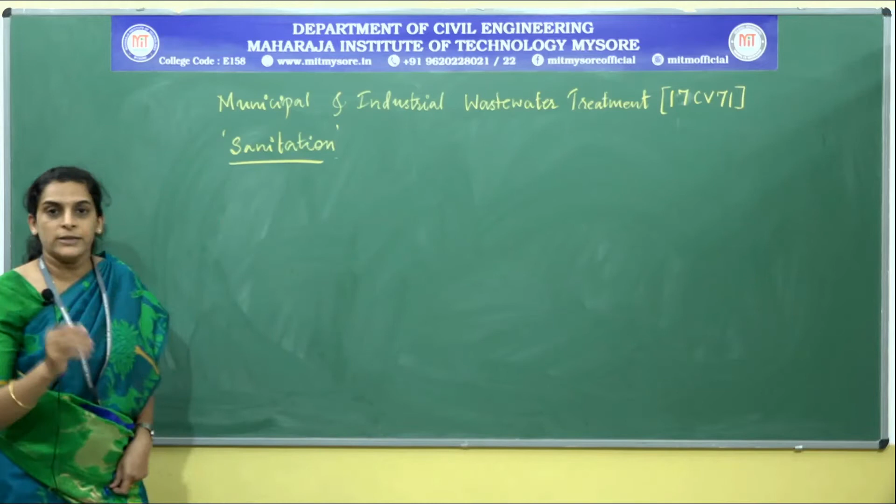So, proper maintenance of the sanitary condition is a very important aspect for any community in general and individual in particular. So, here it will be all our responsibility to hold these things in line. The next thing is, whenever we are talking about sanitation, the word that is very much applicable is sewerage.

So, what is sewerage? It is the process of removing sewage. So, I'll just tell you what sewage is. Sewage is nothing but the liquid waste, or technically speaking it is the wastewater. So, the process of removing sewage from a community is sewerage. So, what does it mean by removing sewage? It is the proper management of the sewage generated in a community in terms of residential, commercial and institutional. So, this will be the sewerage.

So, what is the next thing? Sewerage system. Sewerage system is nothing but the network of sewers. So, here what is a sewer then? Sewer is a conduit or a pipe in which the sewage is carried. That will be a closed conduit, but it shall not always be flowing full.

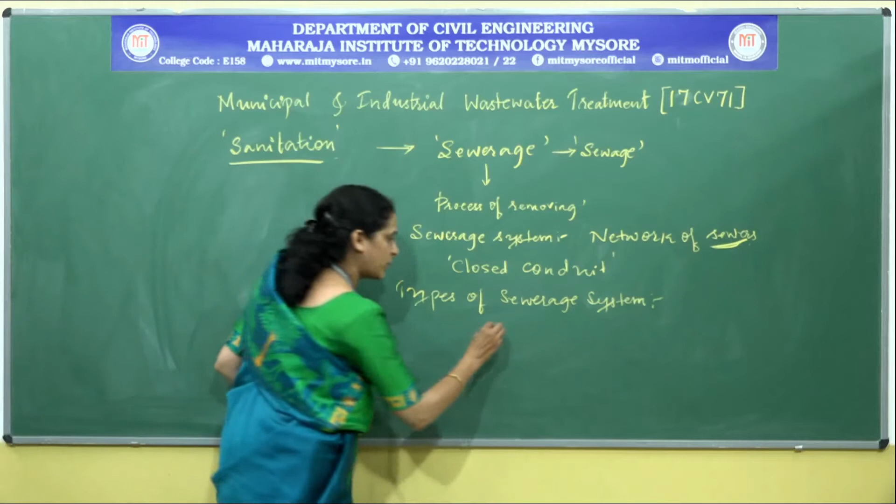The next important thing flowing on with this is the types of sewerage system. Types of sewerage system will be very important to understand, because all of us people in a community will produce different types of sewage. So, the first type of sewerage system is separate sewer. But before going on with the types of sewerage system, we shall go with types of different sewer systems, which will make this sewerage system easier to understand.

So, different types of sewers are separate sewers, partially separate sewer, and the next one is a combined sewer. So, what is this separate sewer? As we all are aware, sewage is very important to understand. That is, it will include domestic, industrial, stormwater, right?

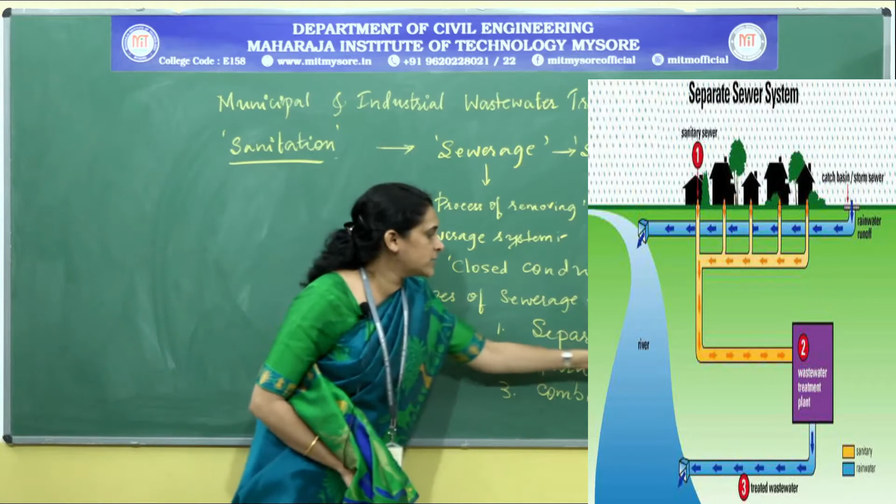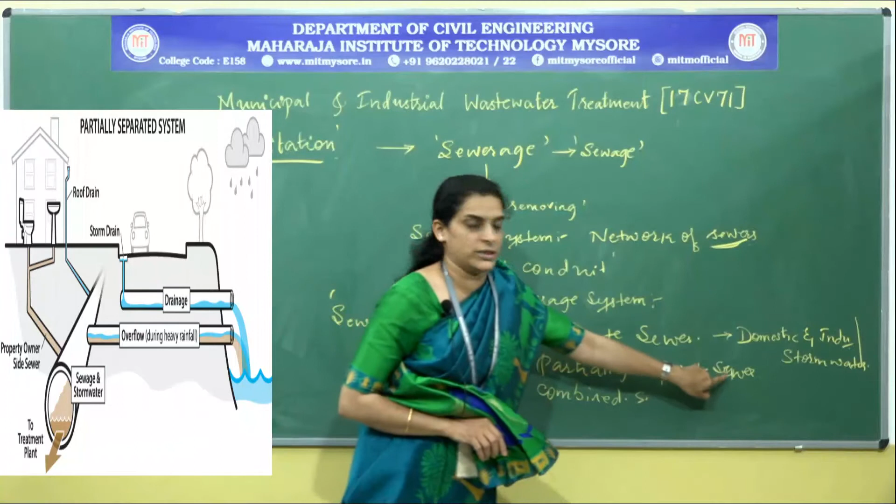Here, separate system means domestic and industrial together will be carried in a separate set of sewer, while storm water will be carried in a separate sewer. So these two are two different conduits. Fine. Next, partially separate sewer. As the word itself indicates, a part of the storm water will be made to pass through the domestic and industrial sewer, and the remaining storm water will be let in a different conduit.

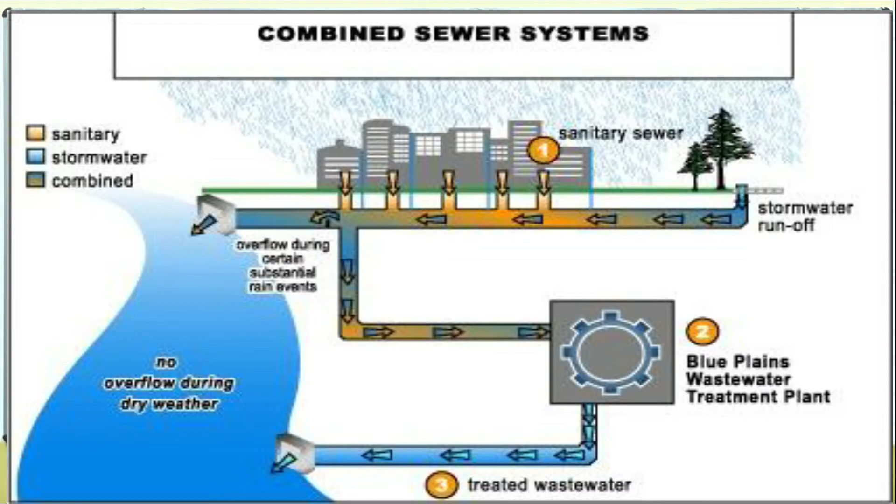Next is the combined sewer. In combined sewer, domestic and industrial will be together with different characteristics, and with that storm water will also be let. So what we can tell here is all are having different types of characteristics but vary in their strength. So we cannot just combine all these three types together. They have their own pros and cons if they are let individually or together.

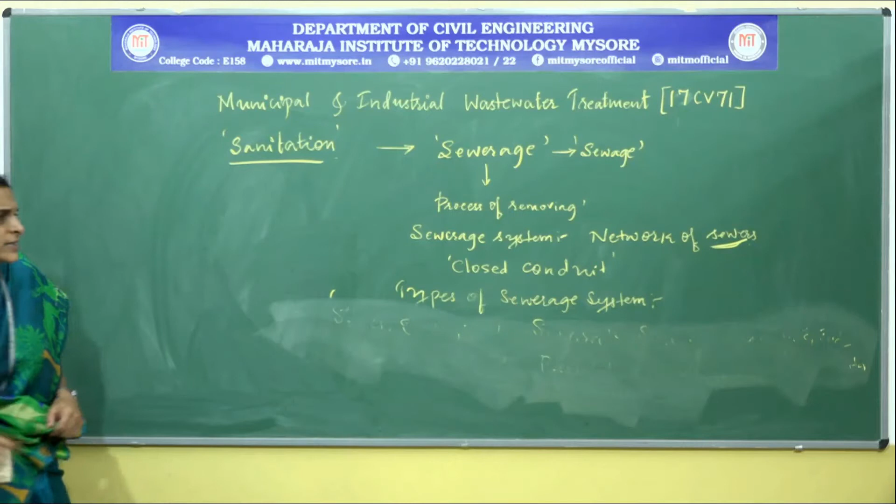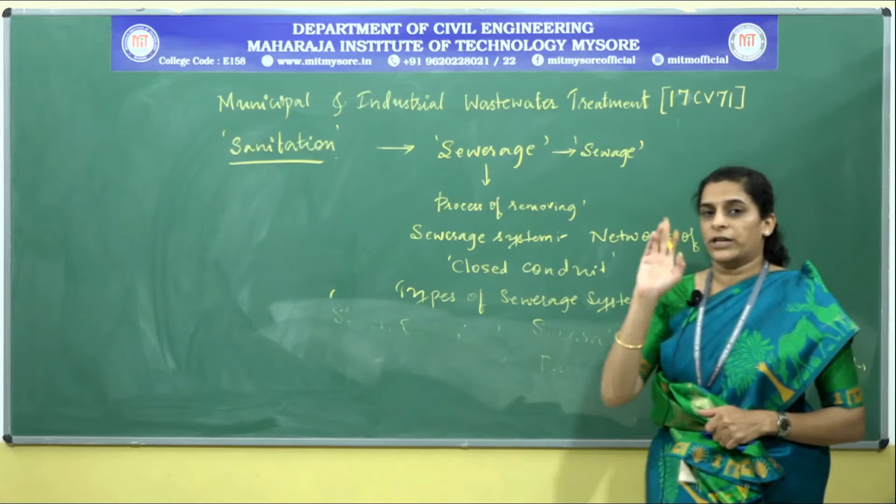Next is the types of sewerage system. So what does sewerage system mean? As I said, it is a network of sewers. So in this sewerage system, the thing that has to be kept in mind is that it will have different types of equipment, devices, and very importantly various appurtenances in line. This is to properly manage the sewage that is being generated from a community. So all those together will form the sewerage system, but it excludes the treatment. There won't be any treatment in this word. Only collecting would be a matter here.

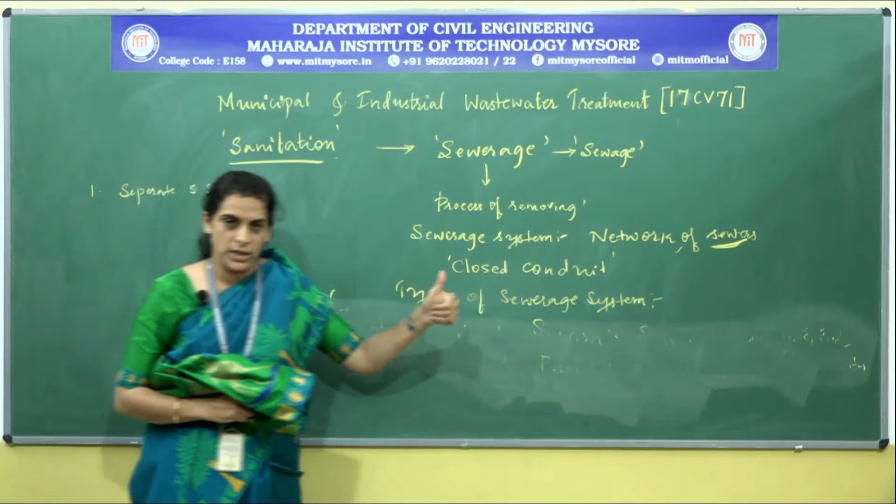The next thing is the types of sewerage system, of which the first one is separate sewerage system. As we all know, in separate sewers, we let domestic and industrial in one conduit and stormwater in another, while here the highlight is the domestic together with industrial let in one conduit and storm water let in another conduit.

So what we have to see here is the collected waste from this conduit will be diverted to the treatment unit. That itself is very important because the proper management of sewage is totally dependent on the further process, that is the treatment which we will be giving out.

Next, this storm water, that is the conduit in which storm water will be there, will be taken to some receiving water bodies. I am just telling it as receiving water bodies because the water body may be a river, lake, a small stream, pond, etc. Provided the storm water should be in such a position that it will not harm the natural characteristics of the receiving water body. Of course, we may not think that the storm water will have any harmful characteristics in it.

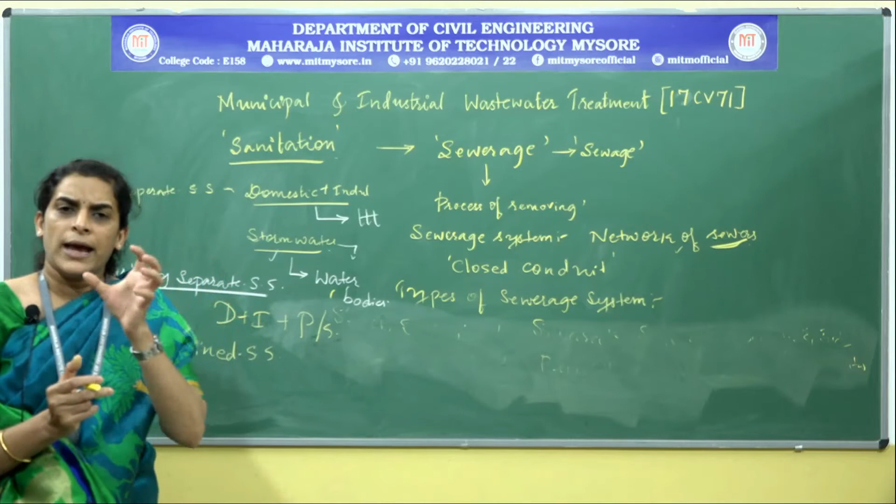So obviously it will have high strength wastewater because the sources of generation will include residential and industries; industry here may be a small or medium industry, in some cases even a larger industry. And it has a media for dilution, the storm water. So the mode of treatment may vary slightly, or it may require a lesser sort of treatment because we have mixed the high strength domestic and industrial wastewater with the storm water.

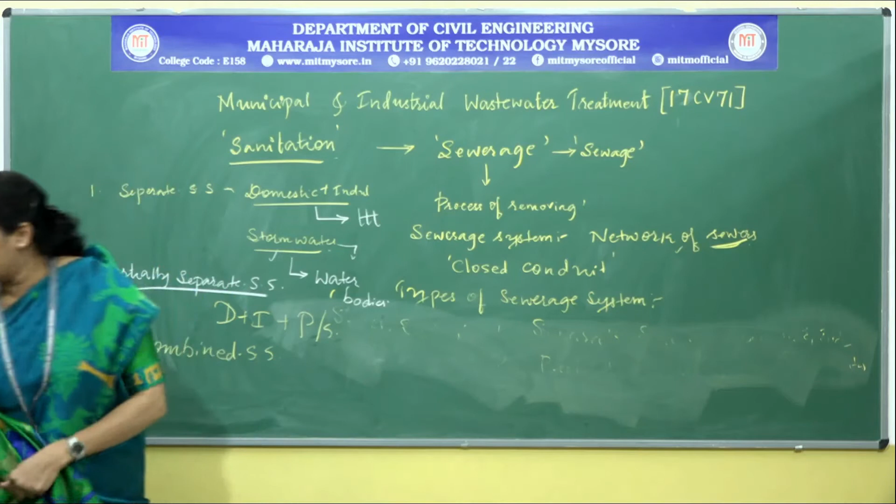So next, after knowing the basics of sewerage system, what does this sewerage encompass? The one word which we will be talking about throughout this topic is sewage. We have certain elements to concentrate on. So here it is, sewage management system. We are supposed to know certain elements prior to the startup of this subject. Every student will be very keen in knowing why we are going with this subject.

The first element is the sources of generation of sewage. I just highlight the word sewage here. It means we have to have a clear cut idea about the source from which we are gathering that sewage. Obviously, if we are talking about the community, we will be having residential, industrial establishments and institutional. Next is the very important on-site processing.

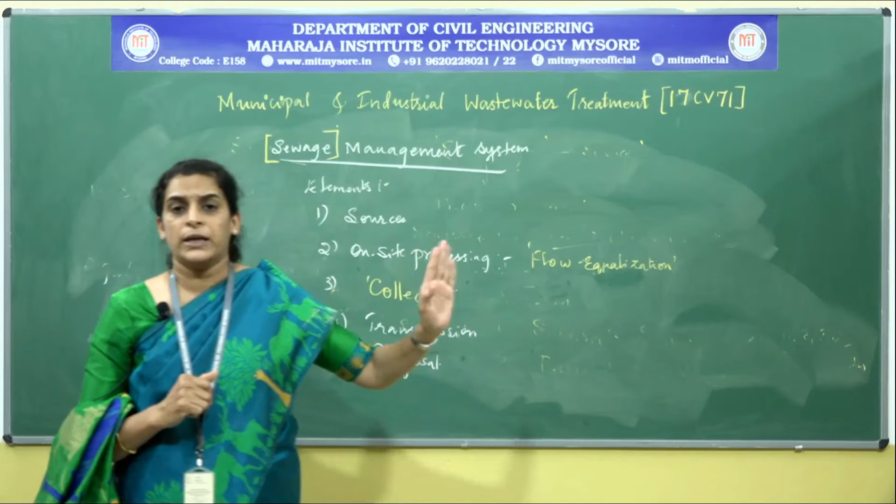So, what does it mean by permitting the water body to receive the wastewater? As we all know, the water body cannot sustain wastewater with high strength. That strength depends upon the characteristics or the constituents that are present in the wastewater. So, not all waste can be let into the water body thinking that it can clean by itself. The self purification plays a vital role for any water body, that we will be speaking in our forthcoming classes. Fine. So, the next thing is, what is the necessity for this sewage management?

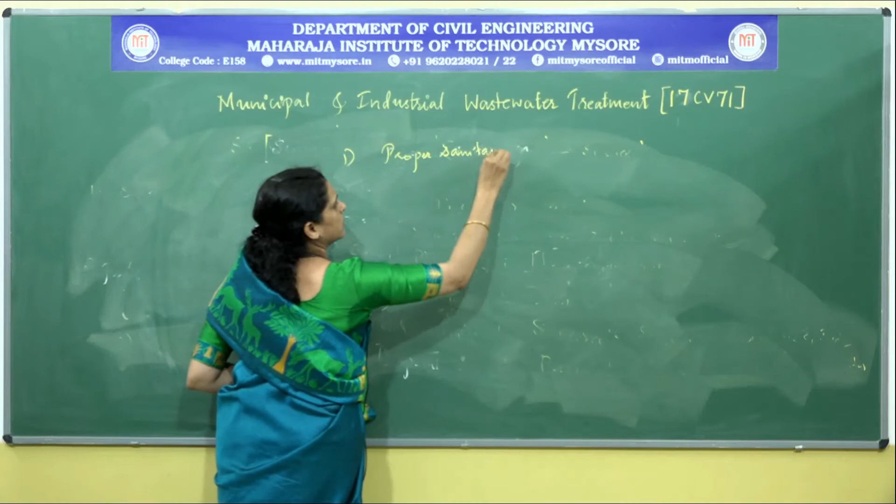Yes, the very necessity of managing the sewage system is to see that a community will be free from outbreak of any epidemics. Of course, this in turn is highlighted as maintaining proper sanitary conditions, right. So, this is a very important requisite. So, why is it important to go with the sanitation? That is an apt word here, to maintain proper sanitary condition. Next, to avoid any outbreak of epidemics in a community. So, outbreak of epidemics,

to avoid this. Next, to see that the community is with proper mode of treatment for the sewage that is being generated. If at all they are not aware how the waste that is being generated by them will be disposed or managed, then what is that ultimate thing they can do? That is the proper management.

The very important aspect here why we require the sewage management system is to check for the rapid and safe management of the sewage generated by us. So, what happens if we are not properly managing the sewage that is being generated? It totally causes health hazards, obnoxious to human beings. Yes. So, these are certain things that show why sewage management is necessary.

Next thing is that after knowing all the necessity for the sewage management system, the very important thing to know is collection and conveyance.

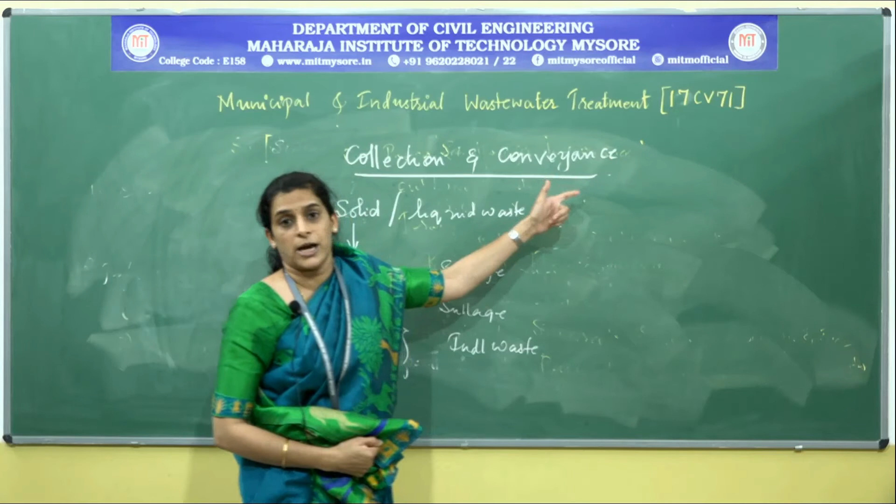So, first of all, we have two different types of collection and conveyance. The first one is the conservancy system. The second one is the water carriage system. We will get back to this now.

How is this refuse disposed of? Usually in India, we are still partially following the conservancy system to manage these wastes. So, what are these together? Refuse. It is a term for useless material, as we all know.

So, how are we aware that the conservancy system is not proper for management? Because, as we all know, it is an old mode of disposing the waste. Here the waste will be carried on the heads of labourers or on open carts so that it is led to a place far away from the source of generation.

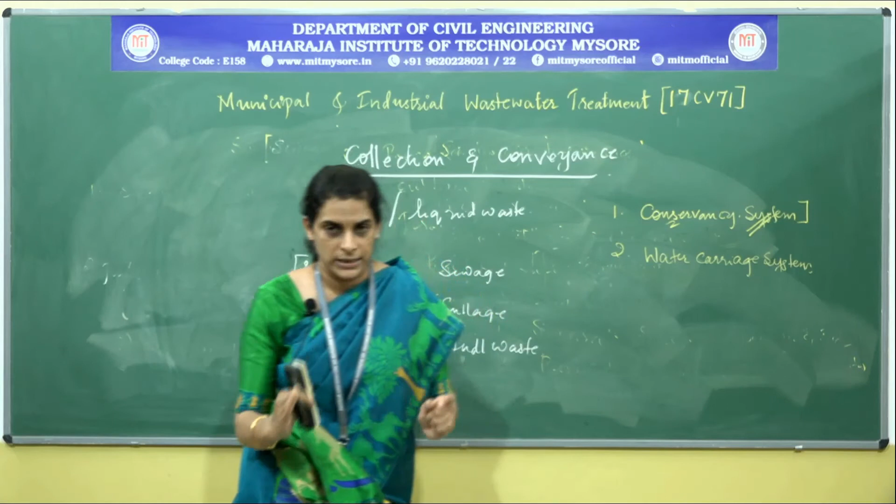So, now coming on to the term conservancy. What is meant by conservancy system? As we all are aware, we generate different types of waste, and these wastes will be handled and conserved separately. Hence it is known as the conservancy system.

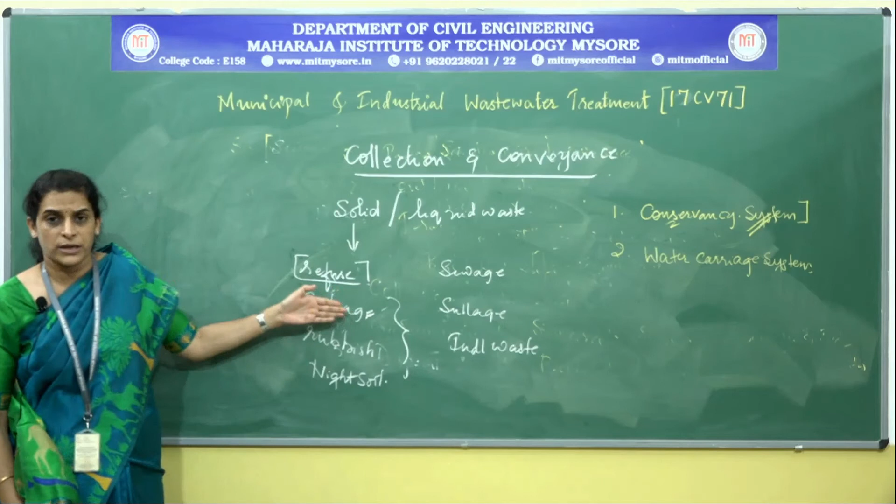So, now just look at how this garbage is disposed of. Garbage, as we all are aware, consists of organic waste. Since organic waste is decomposable, it can be disposed of in low-lying areas, or more specifically it can be buried. Next, if it is rubbish, that is, if it is combustible, then it can be burnt.

If it is non-combustible, it will be dumped onto low-lying areas, and the night soil will again be carried on the heads of the labourers, taken away from the source of generation and buried underground.

So what is highlighted here is that this night soil, which is the human waste generated, will have to be removed once a day if we are following this system. There won't be any mode of flushing there. So the waste generated will be piled up, that is, the old days' waste will start accumulating, which will be obnoxious, and it will be a serious health hazard for the people who carry that waste on their heads. So we will just see what the advantages and disadvantages of that particular system are.

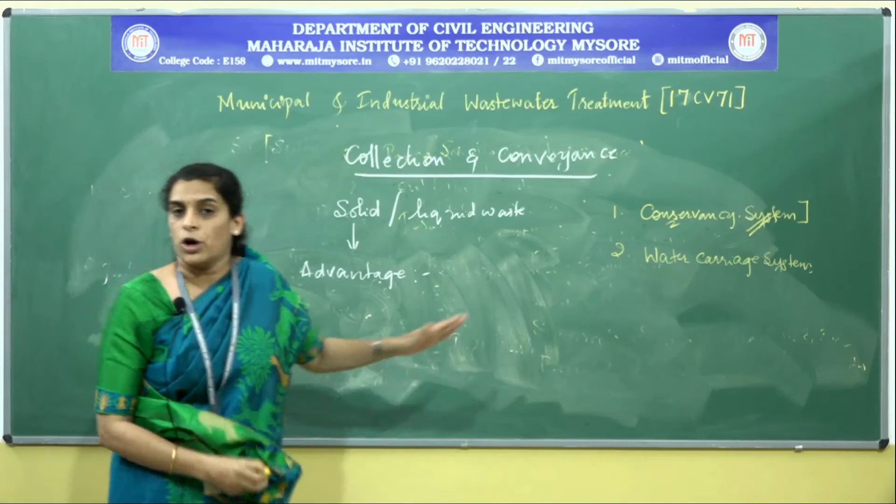The advantage of the conservancy system is that it does not require water, and the next thing is that it does not require skilled supervision. So no water requirement, because it will be carried in pans or baskets on the head of the laborers, or it will be carried on open carts. This is the advantage, because we require no water for dilution, no water for conveyance, etc. And the next advantage is that it does not require skilled supervision.

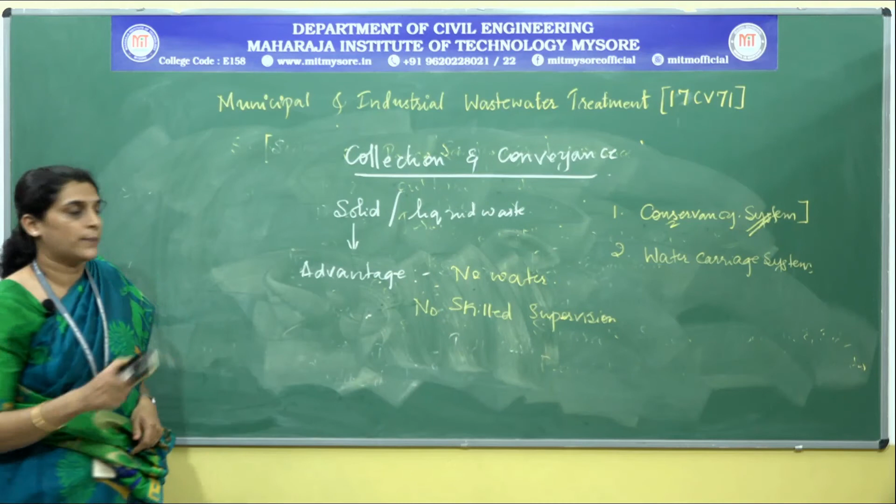Otherwise, there is no advantage with this system. The total disadvantage of this system is that it creates a complete nuisance for the whole community. So we shall just line up the disadvantages of the conservancy system. The first one is it gives insanitary conditions for the community, because as we all are aware

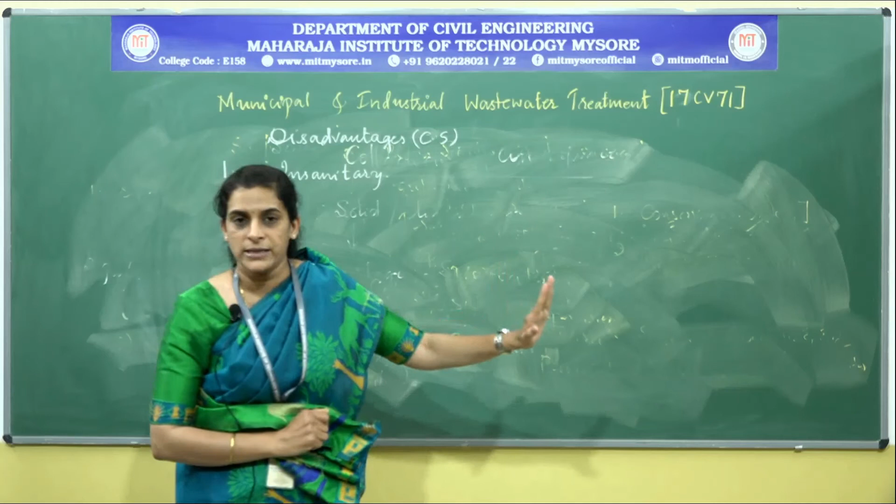it is carried on the heads of the sweepers or the laborers, hence they are more prone to diseases and other health hazards, and it is an insanitary condition to the community, because it will be carried on open carts, especially in crowded localities. While conveying or carrying, it may be spilled, which will be a total hazard to the place, causing odor nuisance, fly nuisance, etc.

Next is, it does not require water, that is fine, but it will pollute water. How is it? As we all know, the night soil or whatever organic waste, rubbish, garbage, etc. generated by a community will be dumped or buried underground. Once it is buried underground, there may be high chances for that waste to leak into the groundwater, which in turn may pollute it. Therefore, this is a point to be noted here.

Next, the compact design of building is not possible. If we are following the conservancy system, we cannot go with a compact design, because the lavatories or privies will be constructed away from the main building. So that requires a larger area, of course. It does not give any compaction there.

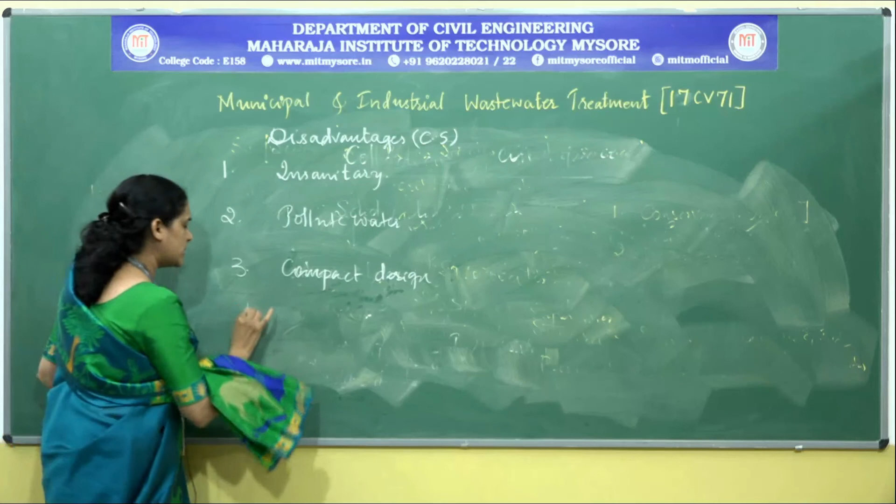Next is, what about the very important role? Operational cost. Whatever the system is, we'll have to look for this first. Initially we may feel that it is very cheap, but the maintenance cost or the operational cost is very high, or in one word, the recurring expenditure is very high because it requires maintenance very often.

The next thing is, disruption of work may happen. Why? Because it is totally dependent on the laborers. If, due to any reason, they go on strike, that will be an uncertain strike. In those instances, the waste generated from a community will not be collected or conveyed; it will be piled up in the community or in a crowded locality. So obviously that will be an insanitary condition.

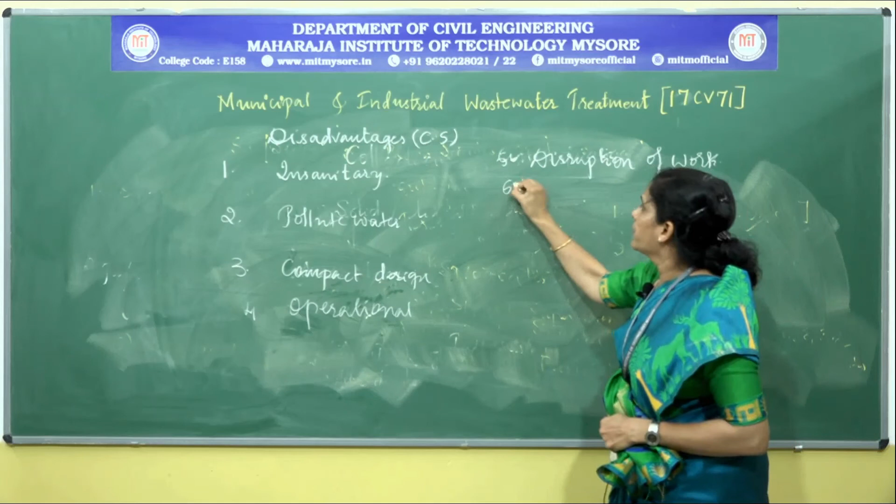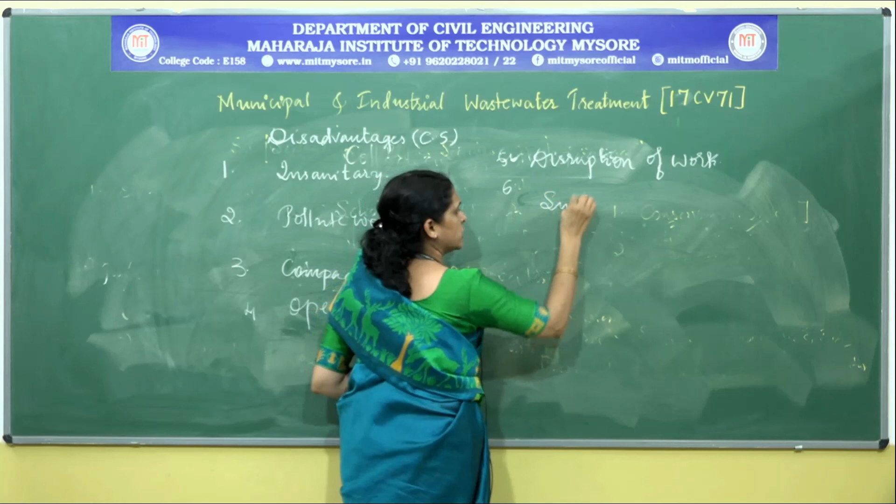Next, whenever we are speaking about the conservancy system, what has to come into our mind is the role of the engineers in the proper management of the sullage that is generated. So what is sullage? It is the liquid waste generated from the kitchen, wash basins or bathtubs. If this is let out in an open drain, it will start causing excessive flow in the locality,

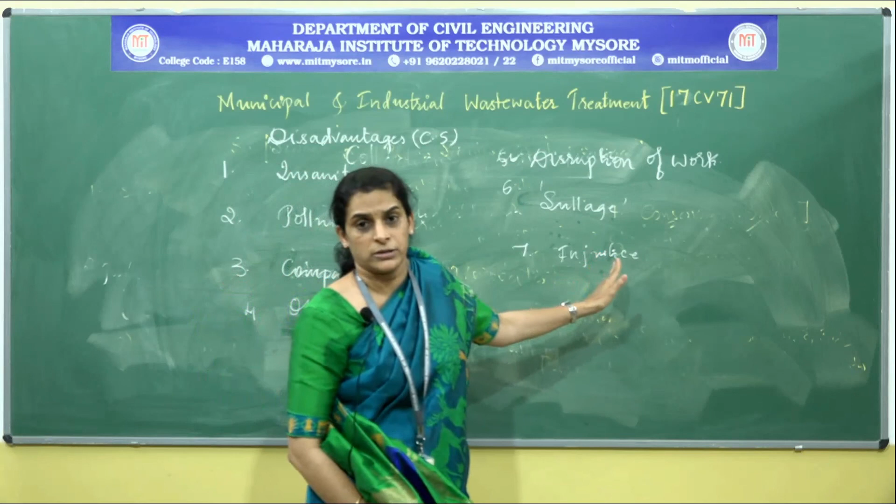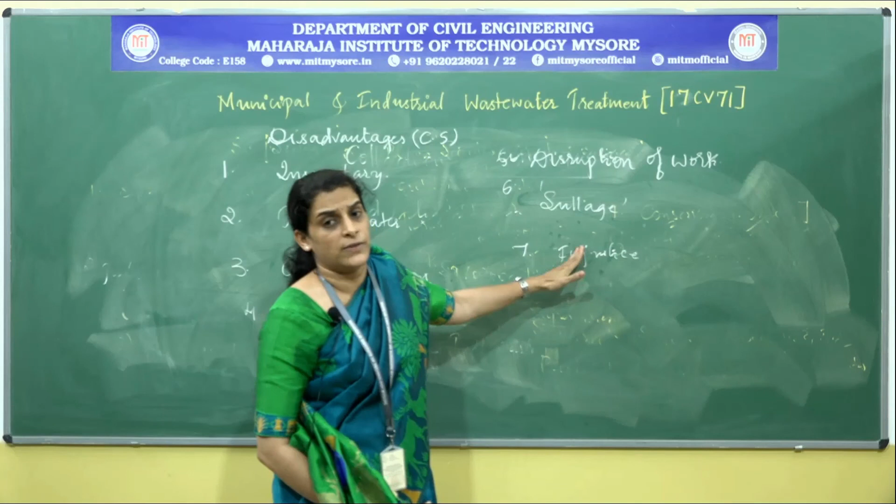or it may even cause flooding there. So looking at all of these disadvantages, we can think the conservancy system is not apt for a community. Above all, it is a total injustice and inhuman to the laborers who are working for it, because they are more prone to health hazards and all sorts of nuisances, that is odor nuisance, fly nuisance. So it is totally inhuman asking people to follow this conservancy system. Thank you.